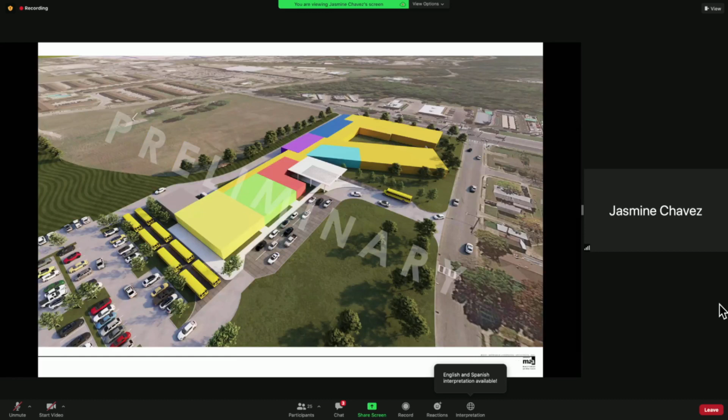And again, this is the one-story scheme. So, on to the second scheme. Oh, just kidding — here are some preliminary mappings of what it would look like on your site.

Again, the way we shaded the plan is the way this mapping study is shaded, so you can see roughly where the cafeteria is, the gymnasium, the library, the administration. They're in turquoise, and academic areas are in gold. This plan is flipped around, so West Illinois is at the top there, and you've got Keats Drive on the right with the drop-off loop and the admin.

And we have a couple of views, don't we? Yeah, we do. That covered entry is roughly the location of your existing chiller equipment, which this will be taking the place of. So West Illinois on the right, Keats down below, rotating around. Soccer fields, potential location for them beyond, at the back of the site, close to the park, green areas.

That back drive would be used mainly for service, not necessarily everyday use — it's a fire lane for emergencies. Required for the site, but not necessarily part of the main circulation throughout day-to-day operations. So, quick run through over those again.

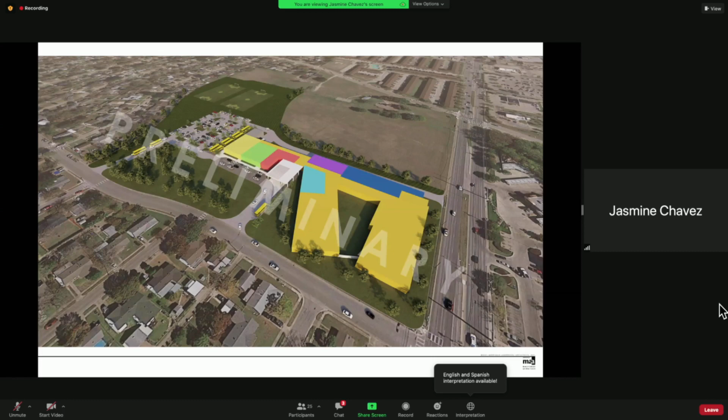And option 2. This scheme involves a two-story classroom wing, seen in yellow. The public amenity spaces such as cafeteria, storm shelter, admin, and the entry all stay in roughly the same place, but we do some shifting around to get special education closer to the front for accessibility reasons and to keep it central to the academic areas. That pushes the arts and library media center out towards West Illinois.

It provides a really nice opportunity to do something public on that side. The circulation is the same. We investigated an alternate site loop drop-off that could possibly increase parking, and that's something we'd like the community and the school's feedback on. This is the alternate option of trying to extend that and bring it closer to the academic area for ease of access, encroaching on that easement a little bit.

And here's that massing, so you can see the two-story classroom wing and how it affects the site. You get more green space to the south, an opportunity for a larger, more open play area. And you have an opportunity to do something closer to the drop-off as well. Certainly.

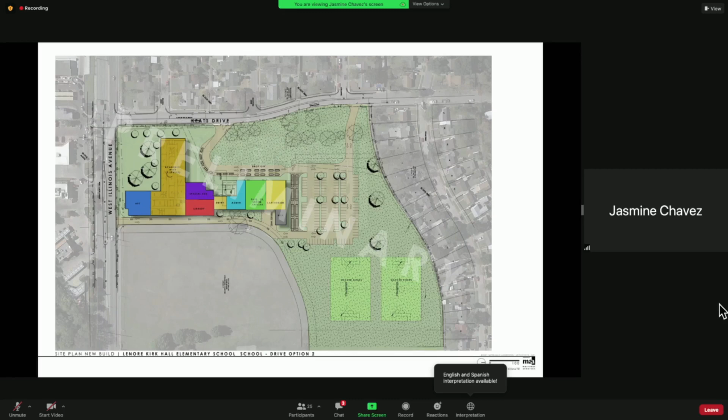When you're looking at it from the street, it looks very gentle, like a very gentle slope. But it's actually about 15 feet.

So I think what that ends up doing to the building is that even though you have a two-story wing, after we finish grading the building and the site, it won't look very massive. It'll go along with the topography and step down, not be obtrusive to the neighborhood, won't be an eyesore or imposing. So that's really not a concern with the two-story scheme, and we'll take advantage of the natural topography of the site.

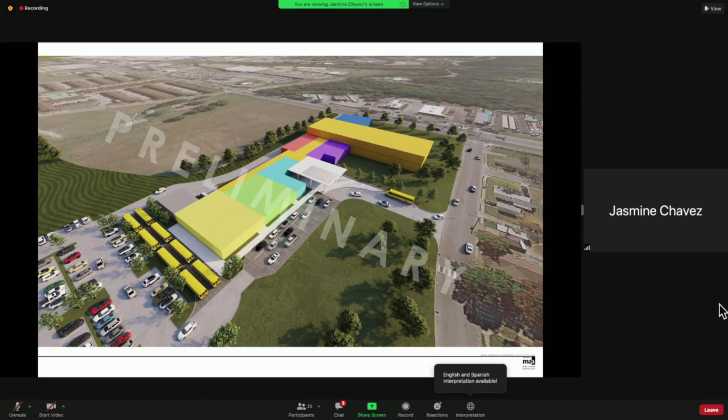So here's a rotated view of the two-story scheme.

Now we get into questions of architectural style. We've spoken to the community in our last meeting and we'd like to present a few options. None of these are all or nothing. If you see elements you like, feel free to take notes and let us know, but we just want to show you some options for style.

It came up in the last meeting that the Latino Cultural Center seemed to have an influence on a local high school, and this school has a significant Latino population in the neighborhood, so we thought it might be nice to give a nod to that in the style.

So here we have some buildings that show some influences and how they were implemented. It can be done through color, massing, simplicity of materials, turns, reveals, shadows, lights. Here are some examples of how that could go.

One thing that's so remarkable about Hispanic and especially Mexican architecture is the way it responds to the sun, with vibrant color, geometry, and beautiful courtyards, and even in the use of wood, the textures are very rich and saturated—very bold, one of our big words.

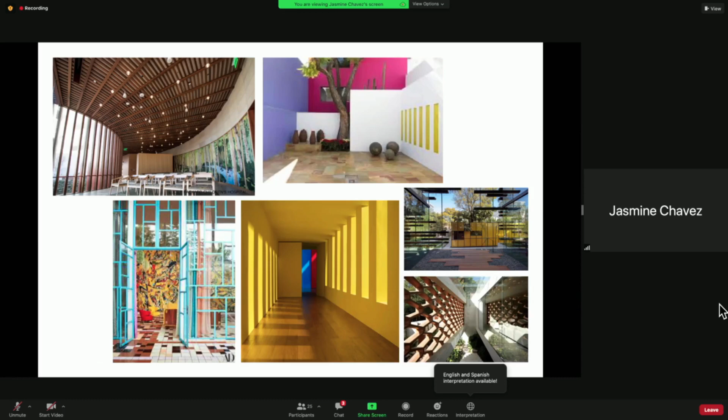We definitely think there are elements we could pick and choose from examples like this that could lead to a really nice building for Hall Elementary. So keeping these in mind, we'll move on to our next examples, which we like to refer to as a modern brick schoolhouse.

They use texture in the way they turn the brick—you can see some alternate, push in, push out, creating lines of bricks and patterns that play along with the shadows of the sun. It's a very traditional material, very cost effective too, but it can be used in some really cool ways. Here are a few examples of that.

Usually when people imagine a brick schoolhouse, they immediately imagine a red brick schoolhouse. But brick comes in a lot of different colors, and your existing building is a more blonde brick. We can explore shades throughout the spectrum, and if we go toward brick, we could imagine a palette that gives a nod to the existing building with that blonde brick color.

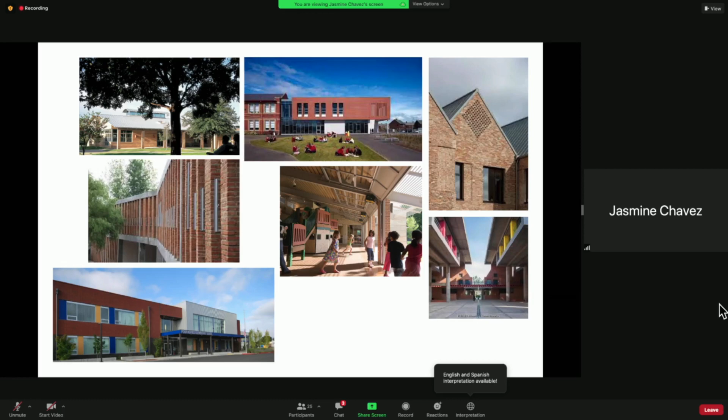The left center photograph is a school building created with recycled brick, and the lower left shows a mix of brick and different colored panels used in a school. The low center image shows an example of using many different colors of brick in a playful fashion—a really nice image with lots of colors, textures, and patterns we can implement. You can do multiple colors, like the bottom left, bring in texture and pattern. I've done it before, and it looks really cool.

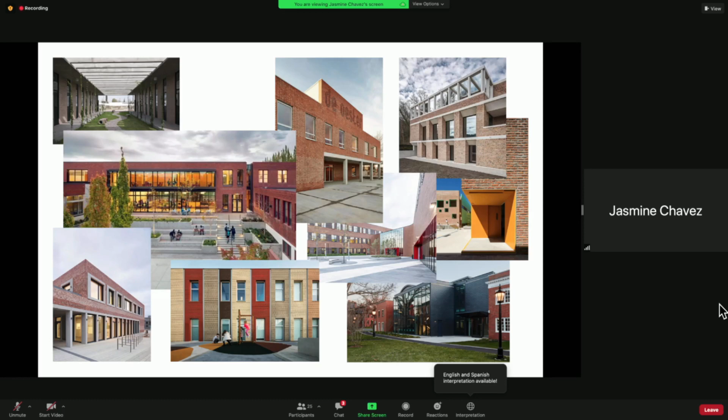Absolutely. Next, a different kind of style would be a little smoother, similar to some of the Latin images we showed—stucco, monolithic, using breaks in the wall like windows to really pop the building and give it character with positive and negative space. It can be done really well and efficiently, and paint and integrated colors go a long way. If you do a special moment, like in that middle left image of wood and metal panel, a little goes a long way and really stands out.

Absolutely. Not only that, but stucco is a very economical material, and if you'll remember back to the slides on Latin and Mexican architecture, it's used very frequently in those vernacular forms.

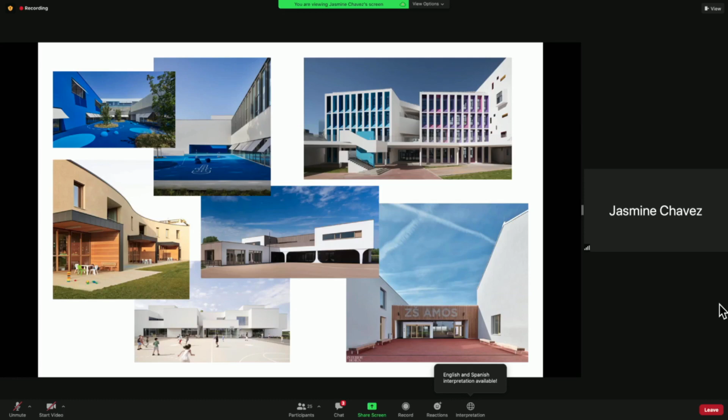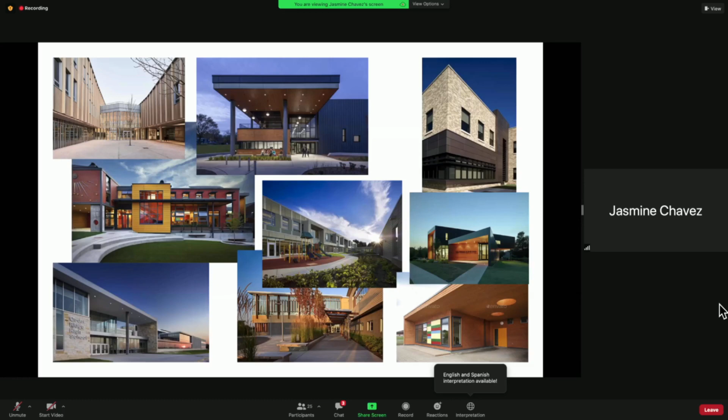So this last style, I like to call it just panels, because there are multiple kinds. Commonly you'll see metal panel, but there's also a product called fiber cement—it's a little matte, but it gives a really nice warm pop of color. The bottom center image has a lot of fiber cement siding; it's almost like a wood look, but it's not. There's also actual wood siding panels, and they can have a really modern, monolithic look. They create some great lines and can be used to make lots of fun forms.

Here's some more examples—stone panels, metal panels. Very modern typically, very cool, looking towards the future material-wise, and you can even see how they are used to create some really dramatic moments.

Absolutely agree. And this is a relatively new material—not centuries old like brick—so it's coming into an exciting moment, and we're just starting to see how versatile it can be as an exterior finish. You can have different looks that replicate wood, stone, panel, or concrete. But it's very durable, very cleanable, pretty economical, and very versatile. It's becoming a really popular choice for schools that want to go a modern way.

Here are some more examples, and you can see where designers are starting to really celebrate the exterior skins of their buildings. While I can't see something quite so flamboyant for an entire building, it would be a possibility to have something very expressive at a cafeteria, entry, or library—at an entry feature, at a library, exactly. If there's a place within the building that you really want to emphasize, or that you want to make a really wonderful space, I think that's a good point.

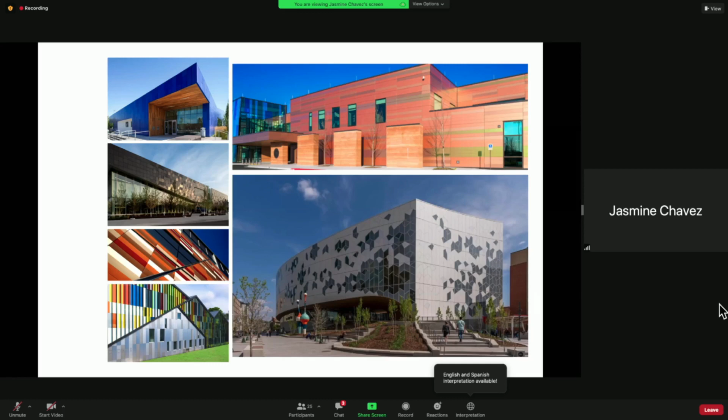Don't get too scared off by how flashy these look—you don't have to coat an entire building in any of these options. Of course, you can pick and choose. We can really celebrate moments and be more conservative and expressive in other places. Certainly, and that's one reason why we gave some examples of more expressive images.

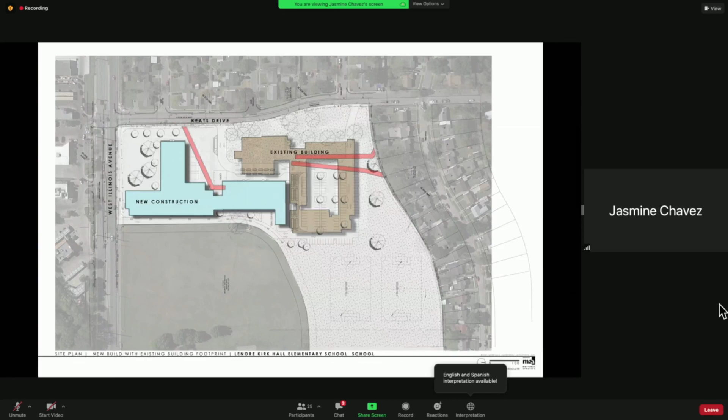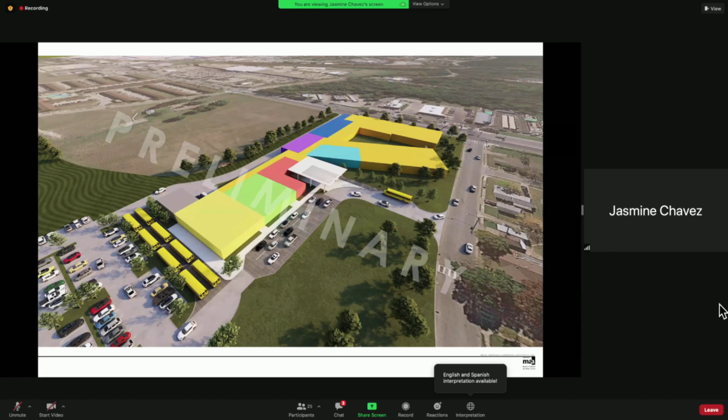Okay, so I can quickly run through option 1 and option 2 again to refresh your memory, going backwards through these slides. Option 2: a 2-story building with a classroom wing. Option 1: a 1-story building with an angled classroom wing and a more enclosed outdoor space.

So keeping that in mind, our poll—that I gave you a glimpse of at the end here—is going to ask you just two questions: your preference for option 1 or option 2, and your preference for material style. There's also an option to write in, so feel free if you'd like to see a combination of one or the other, or if you'd like to feature a particular area of the building that fits in the little box.

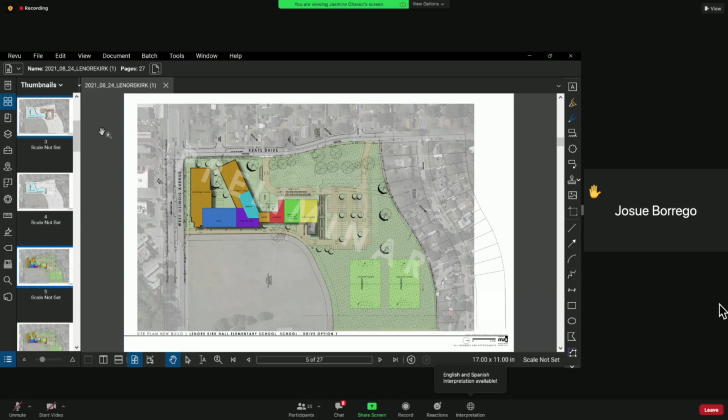I think that depends on the daily schedule. I'm sure children usually have a recess period after lunch or during different times of the day, and wherever they're able to play now, they would be able to play in the new facility. So as far as I know, they're fully welcome to use the soccer fields. In addition, there are educational specifications from Dallas Independent School District that we're also required to follow, including things like an outdoor basketball court and soccer goals. So we're going to make sure all of those outdoor features are contained on the site, so however the staff needs to schedule their day, they'll have all the facilities they need.

I think there's a possibility for the older grades' playground to be closer to these soccer fields, so they'll be brought out and in during playtimes, and depending on how the school and we decide to access the site, they might be available after hours too. But that's a conversation we can have with the principal about how he chooses to lock the site off after hours - we'll keep it in mind. We know the soccer fields are important to the community. Great, do we have any other questions coming in?

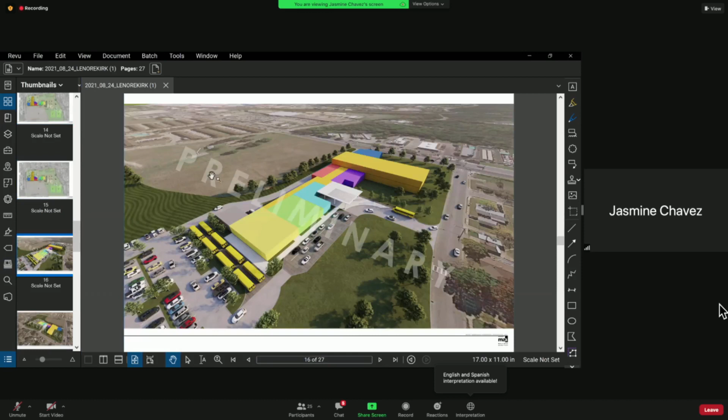They both feature this parent drop-off loop that would run on the lower side of Keats Drive one way and come out on the north side of Keats Drive, where buses would also be coming in, looping down and dropping off closest to the cafeteria and looping back out again.

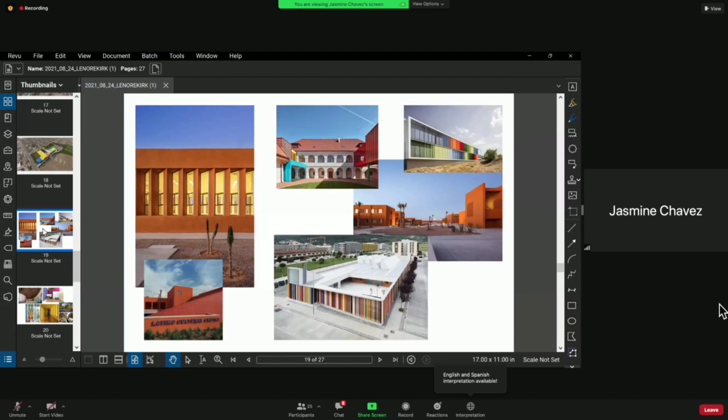A quick run through of some inspiration images for potential architectural styles for the school. We describe them as Latin influenced, lots of use of color, simple forms, bright, vibrant, bold moves and choices.

Second would be a modern brick schoolhouse vibe, traditional material used in more modern ways. You use patterns, you use colors, and banding and choices of openings to really make your point with these kinds of buildings.

We call this one minimal stucco. You are more simplistic in your forms, but you express yourself through things like color and materials. Can be really nice if done well.

You can see that they chose to do these 3D elements for the windows in the image, like in the upper right. I've done something similar. The light plays off of it really well. It helps with shading if you orient it correctly so that the classrooms don't get too bright and hot if they're facing south or west. It can be done really cool.

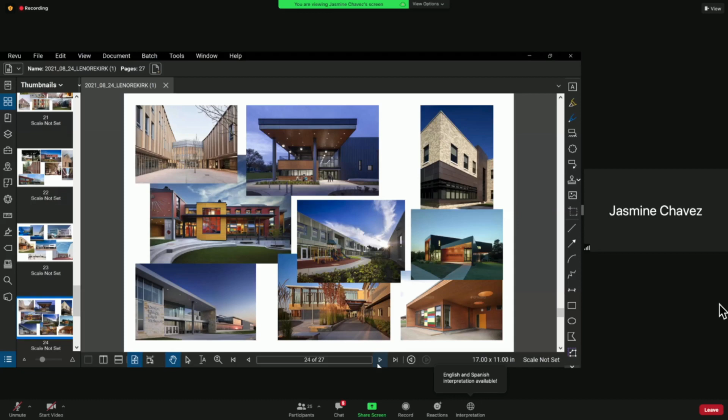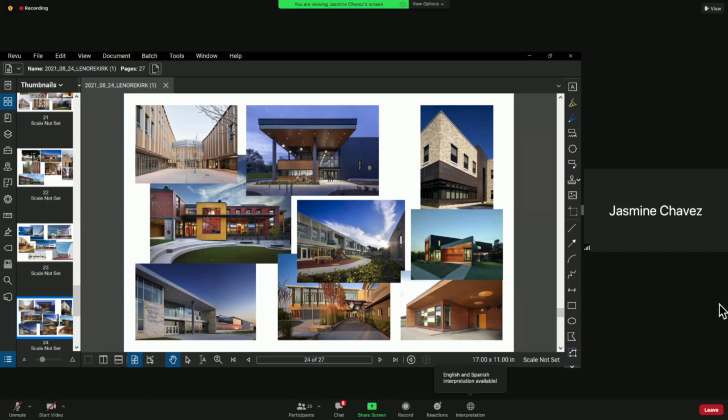Opportunity to do lots of other materials like wood and metal to bring little pops to these kinds of buildings. More panel types - metal panel, wood panel, and fiber cement panel - and they really play off of their own materiality. You can mix up the colors and create patterns with them, and do really big, bold moves with them for sure.

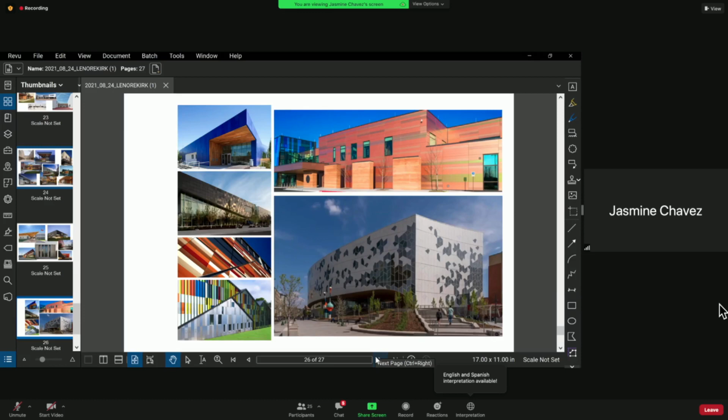Here's an example of them using different colors to express themselves. And that's a quick recap, again, for those of you just joining us.

I would like to share that we've got a pretty unanimous response for option 1, the single story. We're a little more split on style. It seems like there was kind of a popular choice with the Latin, but also with the panels. Then third would be stucco - no, brick is more popular, stucco panels - but we only have a few responses. It's a nice sample of what the community is thinking.

Well, I think we can also have a Latin influence that uses different materials. What this tells me is that there seems to be a little bit of everything, and we can definitely explore how to get a good economical building that looks modern but is still representative of the community. We'll come back with something more decisive for the next meeting, but it seems like people like Option 1. We are in agreement on a single story building.

Yeah, what do y'all think? Option 1. Principal, teachers, any comments? I still have a question about the park.

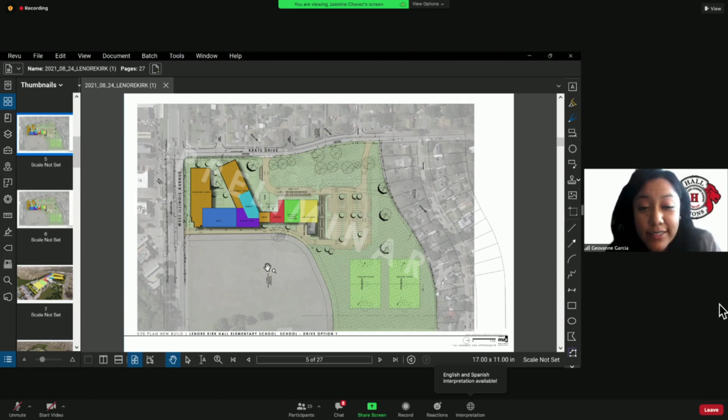So I do understand that there would be access to the soccer fields over here on the bottom right. I'm just having, I guess, maybe because I'm looking at the top view, a question of how accessibility would be for teachers and students. Because to me it looked like, distance-wise, it looks a little far. So I just wanted to get clarification on how they would have accessibility to that.

So right now we're working with the constraints of the existing building, as you know. You can kind of see that the parking lot is currently where the existing building would be. Essentially, the timeline of construction will go: the existing building stays in session as we build the new construction, and after the new construction is built and ready to go, we tear down the existing building and start working on the site. It just kind of works out, and it was a comment from DISD that they would like the parking a little closer to the building. Another possibility would be to put the parking further away, closer to where the soccer fields are, and put the playground where the parking is currently shown. But it's something we can discuss with DISD and with Hall and see what they think.

Another thing to consider is that, as you look at the existing building, that square shape on the left-hand side of the existing building footprint is where the current cafeteria is. So if kids are coming out to recess after lunch, which many of them do, the distance between the play fields and the cafeteria is actually not that different, and maybe even a little bit closer. So while getting to your classroom might be a little bit longer, the distance from the cafeteria to the fields is not that different at all. But we can work on the site plan with Hall and with DISD, and maybe we'll make some adjustments.

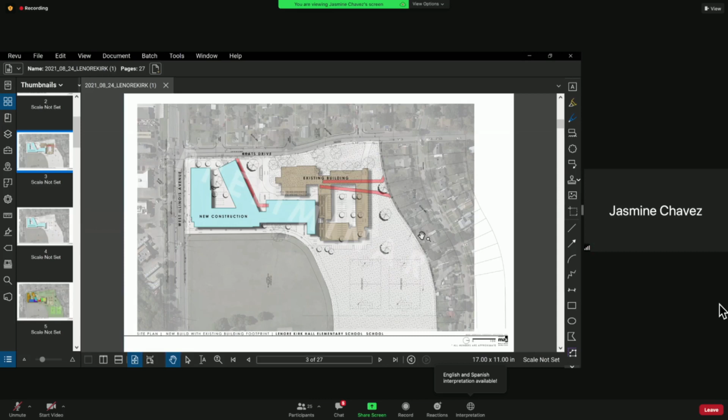Thank you. My last question is: is there a difference in longevity between the materials used on the outside? And if there is, can we translate that into getting amenities on the interior? I'm sorry, can you repeat that question? Are you asking whether the money will be spent on the outside or the inside? About the economy of material use. As we make the selection for the material used on the outside, let's say we go with a cheaper material, and if there's a drastic difference between, say, stucco versus brick, is there a difference in longevity and a difference in cost? And if there was a difference in cost for a cheaper option, could we translate those cost savings to some of the interior amenities?

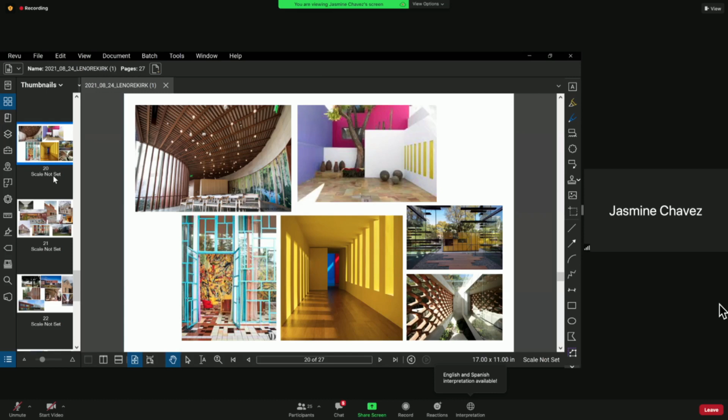In order of cost, I would say that brick masonry is the most expensive option. No, stucco is? Stucco would be the least expensive, but it would require the most diligent maintenance.

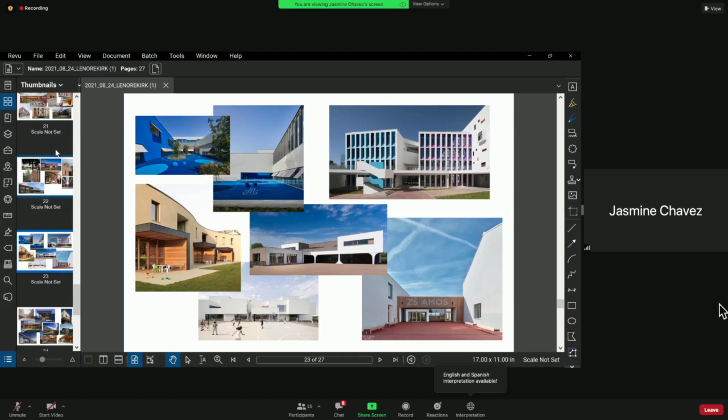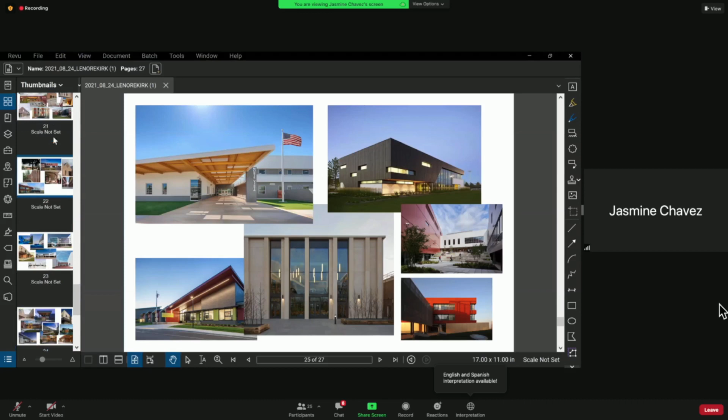Masonry and panel are comparable in price, and with each of those materials you can spend as much as you want. Some of the more flamboyant accent pieces we've seen in panel systems would be much more expensive, obviously, with low ends and high ends. And with brick, if we were going to really go crazy with a lot of different colors and bonding patterns, we could certainly spend plenty of money that way.

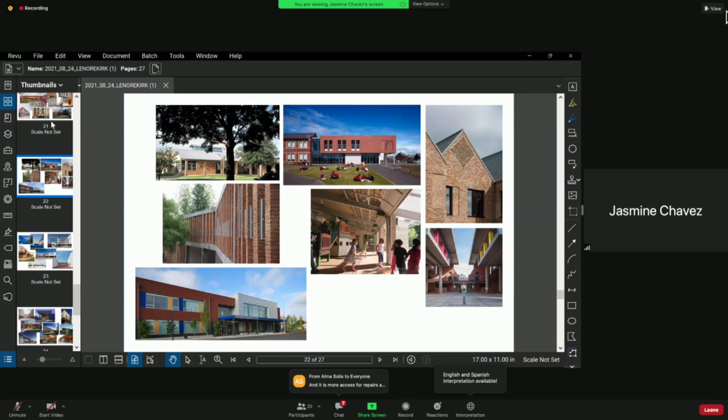But I don't think we intend to do that, and I don't think we need to on a project like this. I think we can make a very good impact regardless of what we choose, and make it work for us very well, efficiently, and economically.

What I find really often is that schools will do something fairly economical for the body of the building, and pick their moments to really highlight an interesting and beautiful material. Like we mentioned earlier, the entry is a popular spot to put extra effort into. The library exterior is another popular spot, and maybe the cafeteria in general, which is a much bigger volume, but tends to have more glass—another material to consider, like how much glazing you want to do.

But there are ways to do it. We don't have to have a lot of these crazy moments—these are more costly options—but you can have a few and do them just right, so it won't be an impossible option to consider, on the inside and on the outside.

I think the fundamental goal in using the budget we have is to make sure it's invested wisely in the places where it matters most, like the library and cafeteria, making sure those places special to students and families look good and are exciting places to be and to learn. The whole thing won't be expensive, the whole thing won't be cheap—we as designers will help you choose your moments, and at the end you'll have a nice goal.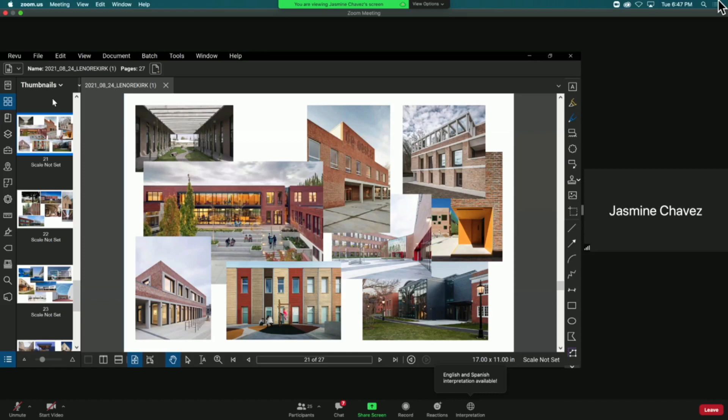Principal, before we go to Miss Elise, I see you have your hand raised. If you could expand a little to give more guidance to the architects, as far as interior enhancements, so we can make sure we have that big idea going forward—if you could expand on what you had in mind, so we're all on the same page about what you're actually talking about.

So we are a personalized learning campus, and one of the things that accentuates the building would be features like flexible seating, nooks and crannies where kids can group together or go for independent study. That's what I was referring to. Obviously looking at longevity first—we want to make sure this building serves the community for decades to come, that maintenance is low, and that it's in good standing for our students and community members. And then focusing on the interior and having those accent pieces there as well.

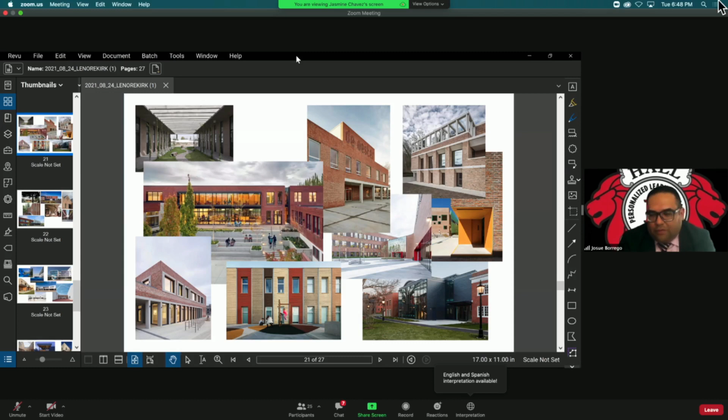Okay, great, thank you. I think Miss Solis, you have your hand raised. Yes, I did. Okay, so I have two comments.

One of the first comments is toward the AC unit. My husband actually works in AC, and he was saying the rooftop units would be better because there'd be more access if something happens, and it wouldn't affect the whole school—versus the chiller, where if something happens it would affect every class, every area. So that's one of the comments I wanted to make.

The other comment was that brick would help insulate the school better, and it's more durable as well.

I understand that stucco requires a lot of maintenance, especially since we have younger kids. Buildings nowadays aren't as well made as buildings were back then. I went to L.K. Hall when I was in elementary, and that building's structure is very strong because it's brick. My concern is that something should be there for years to come, which is why brick is a better option to me.

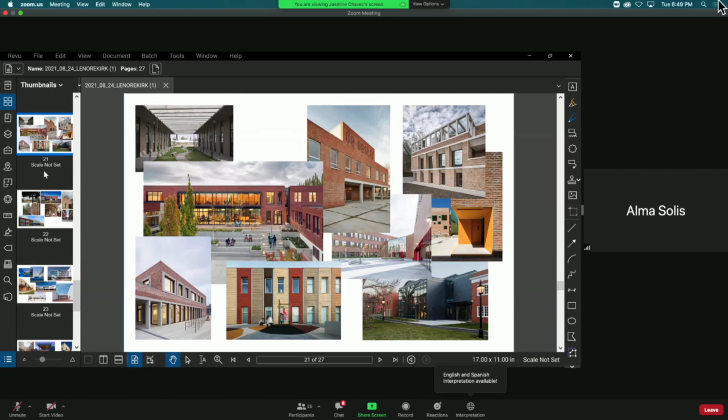And just the rooftop units for the AC, so it doesn't affect every room. If something goes wrong with the chiller, I think the rooftop unit is better. I know you're talking about trying to save money, but we also have to see what's better, because if you save money in some areas, it affects other areas.

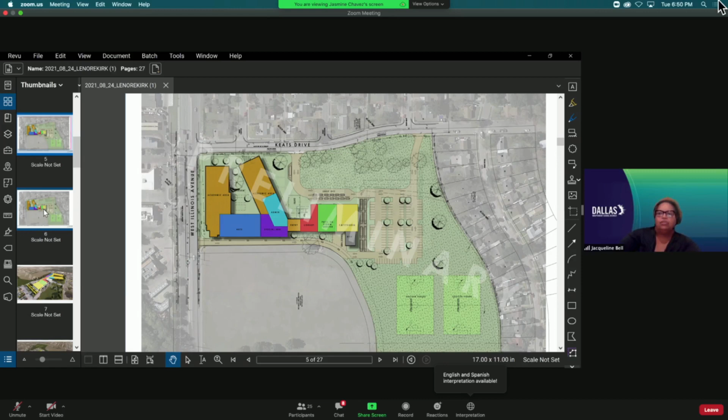Okay, thank you so much for those comments. We also have a comment in the chat room: in both options, is there a cafetorium, or can there be a separate auditorium?

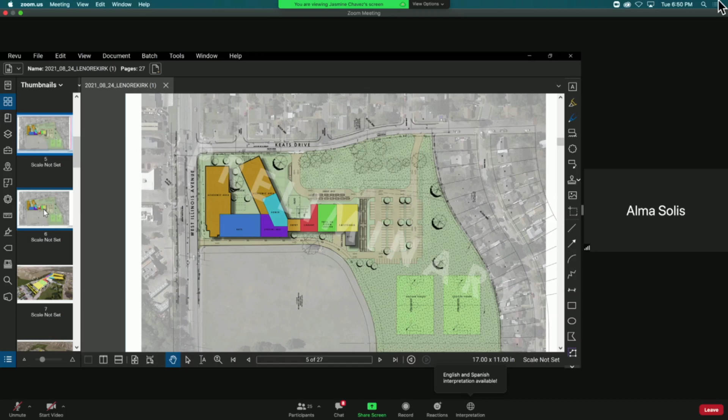The DISD education specifications are calling for a cafetorium. I understand that the existing building has a separate performance space, and it's been communicated to us that you would like a standalone performing arts space, but we're just showing what was prescribed to us by DISD. If we have the opportunity to add a performing space as an alternate, we could consider it, but currently there is no plan for a standalone performing space. Right now, our program calls for a cafetorium with a stage, and that is the auditorium we've been directed to provide to you.

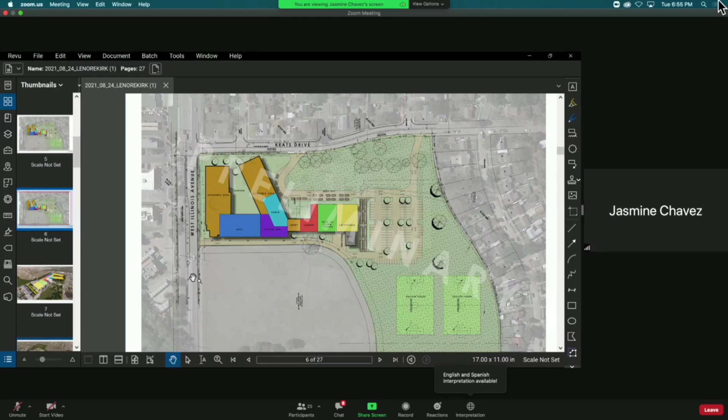Okay, thank you for your feedback. I don't think there's anything else. We still have just the 8 responses on our poll. Well, I think we're getting some great feedback from our community on this project, giving some good direction to go back.

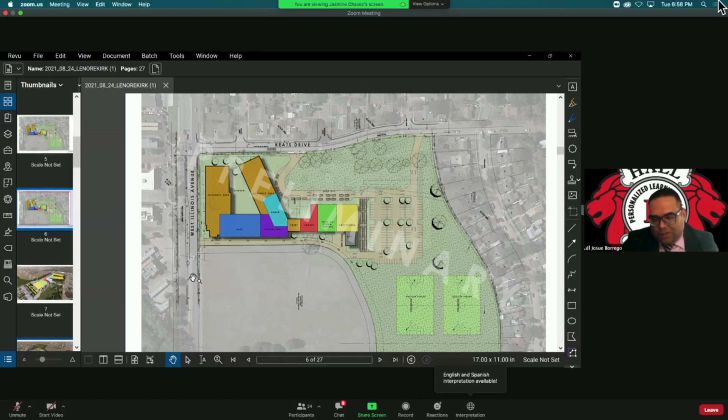Before we leave tonight, we do have one final question. Mr. Alford of the project team, what's the timeline on the building from construction through opening?

Yeah, we're thinking about a fall opening of 2024. So we have about 12 months of design time allotted for this project, and we'll be bidding around this time next year and hopefully start construction. Construction will go on in the empty field while the existing school remains. Once we finish construction, then we'll switch over and demo the existing school and build a parking lot and ball field. So looking at 2024.